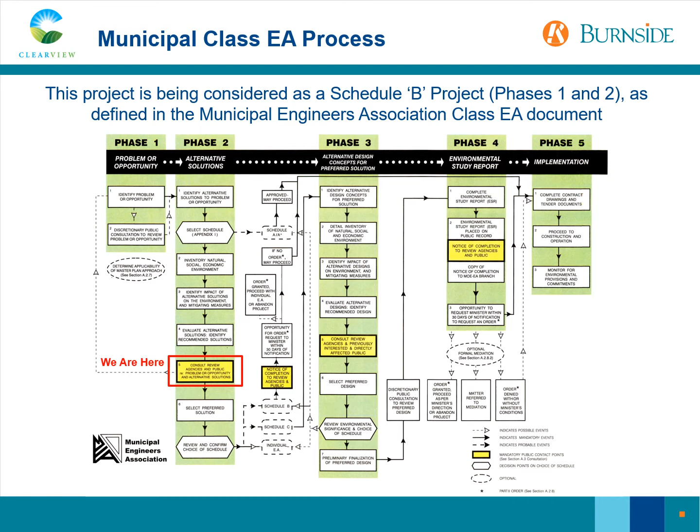The study area includes the areas of Phillips Street, Sunnidale Street, and Centre Line Road in the southeast area of Stayner. The study area is primarily existing residential land use with some commercial and institutional land uses and lands designated as environmental protection. An intermittent watercourse runs in a southwest to northeast direction through the study area and is regulated by the Nottawasaga Valley Conservation Authority. There are several development proposals within the study area that are in pre-consultation and various other stages of approval, including the Manortown Homes development located in the northeast portion of the study area.

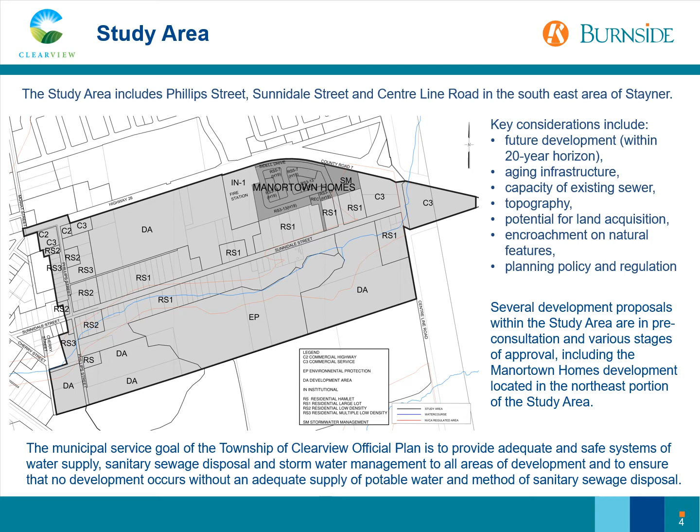Key considerations in the evaluation of alternative solutions for the study area include future development, aging infrastructure, the capacity of existing sewers, the topography of the study area, the potential for land acquisition, encroachment on natural features, and planning policy and regulations. The selection of a preferred solution is based on the evaluation of alternatives with consideration of the technical, socio-cultural, financial, and natural environment. The following slides provide a summary of the existing conditions in the study area for each of these environments.

The majority of existing properties on Sunnidale Street are currently serviced by private septic systems. The study area includes an existing sanitary sewer on Phillips Street and a small portion of Sunnidale Street, which directs the sewage northwards towards the Mowat Street sewer. Based on the elevations and locations of existing infrastructure, the extended sanitary service in the study area would not be able to drain to the existing sanitary infrastructure by gravity alone. A sanitary pumping station would be required.

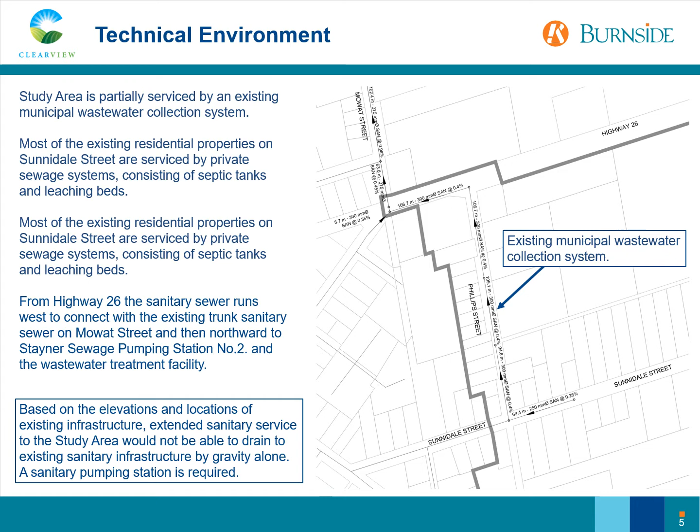The study area is zoned for residential, commercial, and institutional land use. A portion of the study area is located within a drinking water protection zone, significant groundwater recharge area, and highly vulnerable aquifer. A cultural heritage assessment of the study area identified 7 cultural heritage resources within or adjacent to the Sunnidale Street study area, consisting of a farmstead and rural residential properties representative of the late 19th century and early 20th century.

The Stage 1 archaeological assessment determined that parts of the study area have archaeological potential and will require a Stage 2 archaeological assessment prior to any construction activities if the areas identified will be impacted by the earthworks. Where any above-ground cultural heritage resources or archaeological resources may be impacted by the preferred solution, appropriate mitigation measures will be developed. The specifics on the location of future infrastructure placement and construction activities will be determined during the detailed design stage of the project.

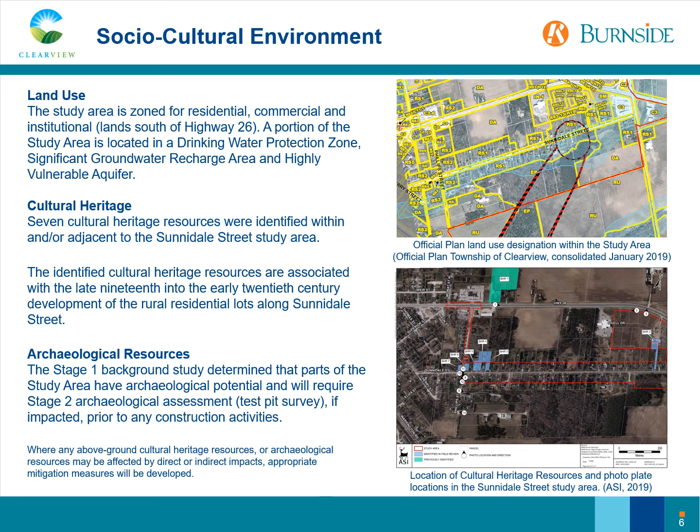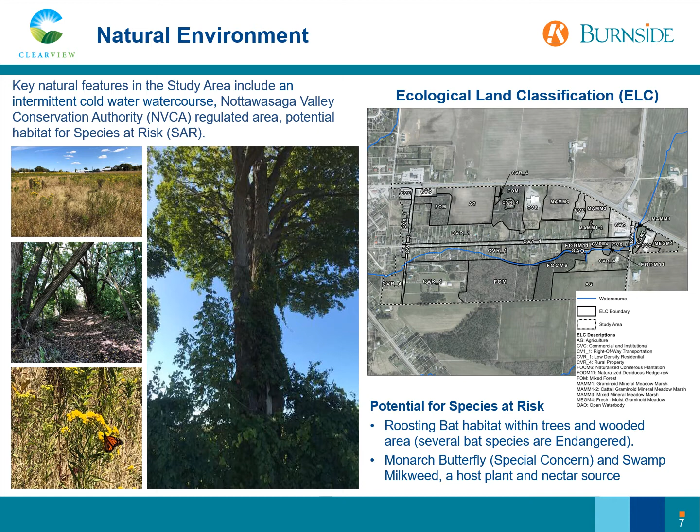The assessment of the natural environment was completed through field investigations to characterize the vegetation communities and the potential for habitat of species at risk in the study area. Vegetation communities in the study area are considered to be relatively common in Ontario. Key natural features in the study area include McIntyre Creek, regulated by the Nottawasaga Valley Conservation Authority, and potential habitat for species at risk such as bats, as well as habitat for special concern species such as the monarch butterfly.

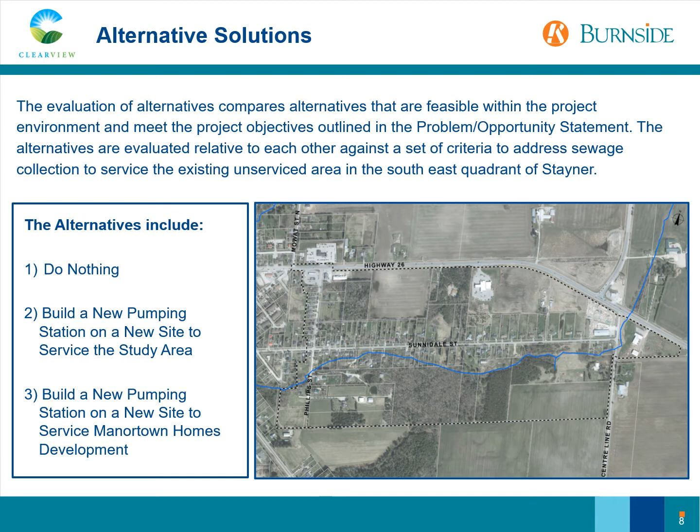Alternative solutions that are feasible to address sewage collection service for the existing unserviced area in the southeast quadrant of Stayner are evaluated relative to each other against a set of criteria which is developed based on the project environment. The alternatives considered include do nothing, build a new pumping station on a new site to service the study area, or build a new pumping station on a new site to service Manortown Homes development.

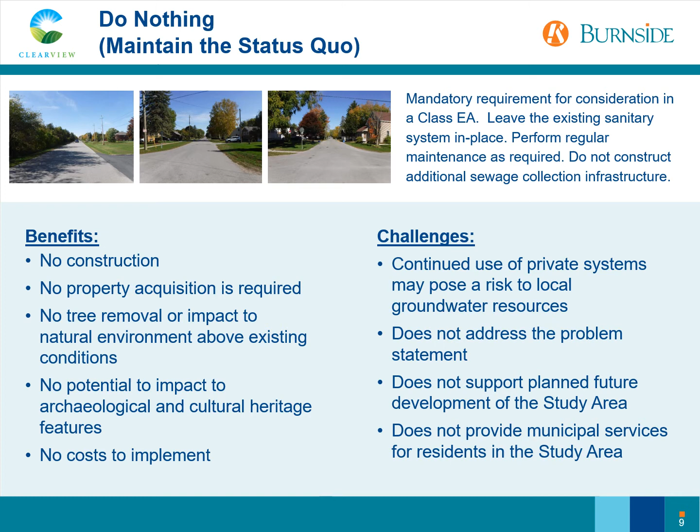This alternative allows servicing for the entire study area over time as build-out occurs, but will require upsizing and replacement of existing sanitary sewers on Sunnidale and Phillips Street. This alternative is the highest cost relative to the other alternatives.

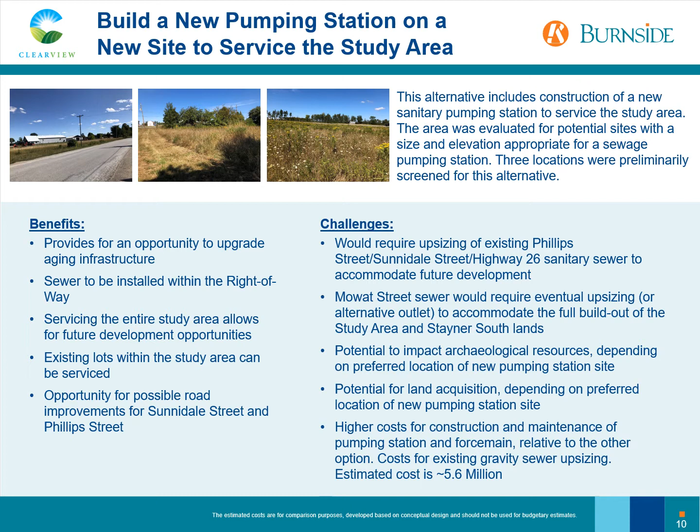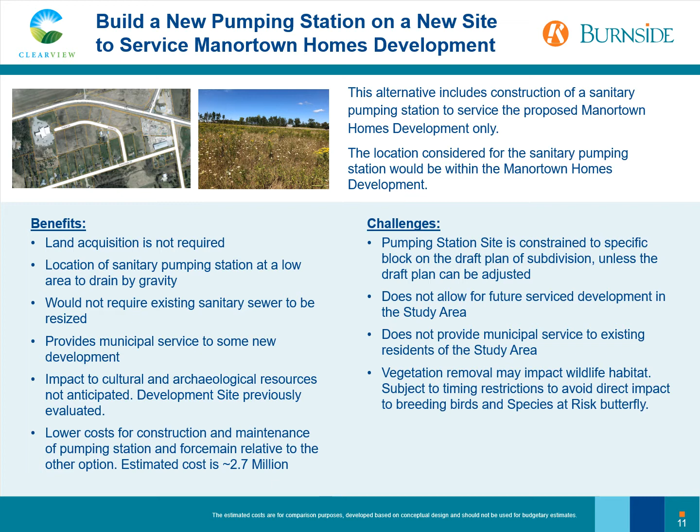Build a new pumping station on a new site to service the Manortown Homes development. This alternative includes construction of a sanitary pumping station to service the proposed Manortown Homes development only. The location considered for the sanitary pumping station would be within the Manortown Homes development. This alternative would not require the upsizing of existing infrastructure, however would not allow for the servicing of existing or future development in the study area. This alternative is a lower cost than the option to service the entire study area.

The impacts of alternatives were evaluated against the inventory of the natural, socio-cultural, economic, and technical environment of the study area, including possible mitigating measures. The alternatives were compared to each other by applying a ranking from most preferred to least preferred based on the level of anticipated impact for each criteria, with the full pie representing the greatest anticipated impact and therefore the least preferred, and an empty pie representing the least anticipated impact and therefore the most preferred. The table provides a summary of the evaluation of alternatives as an average range under each environment category.

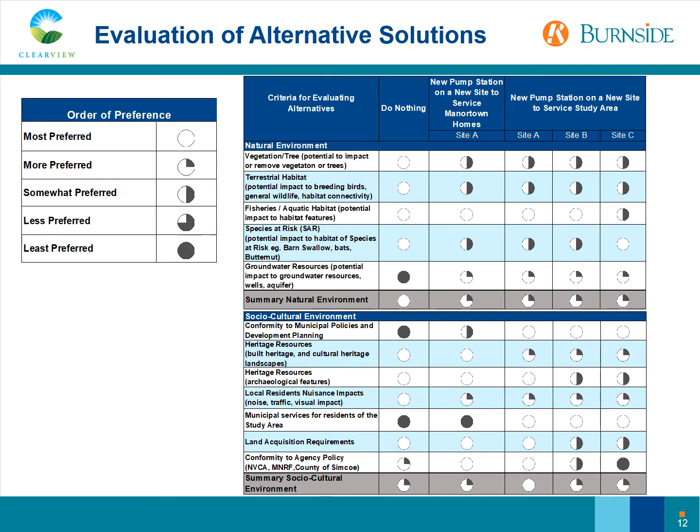The evaluation leads to the identification of a preliminary preferred alternative. The alternative to have a new pump station on a new site to service the study area received the most favorable overall ranking when compared to the other alternatives. Site A is located within the Manortown Homes development. This alternative ranks similarly to the other alternatives for potential impacts to the natural environment. The cost for construction and maintenance of a pumping station and force main to service the study area is higher relative to the servicing of only the Manortown Homes development.

However, this alternative is the most preferred for the socio-cultural and technical environments because it provides municipal servicing to the existing and future development in the study area at a location that can be designed to accommodate the sewage pumping station footprint without the need for property acquisition or impact to potential archaeological resources.

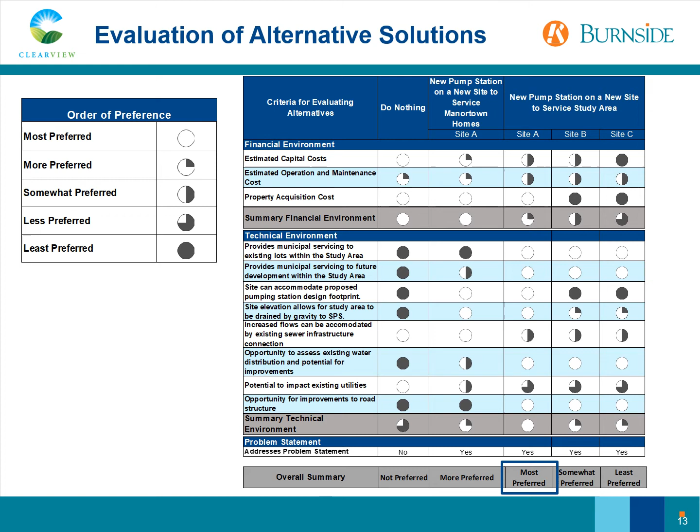The preliminary preferred alternative is to build a new pumping station on a new site to service the study area. The preferred location of the pumping station is within the Manortown Homes development, where the elevation allows for connection to the gravity sewer. This location is located outside the drinking water protection zone and furthest from the watercourse and NVCA regulated area. The site for the sanitary pumping station will be assumed by the township as part of assumption of the overall Manortown Homes development.

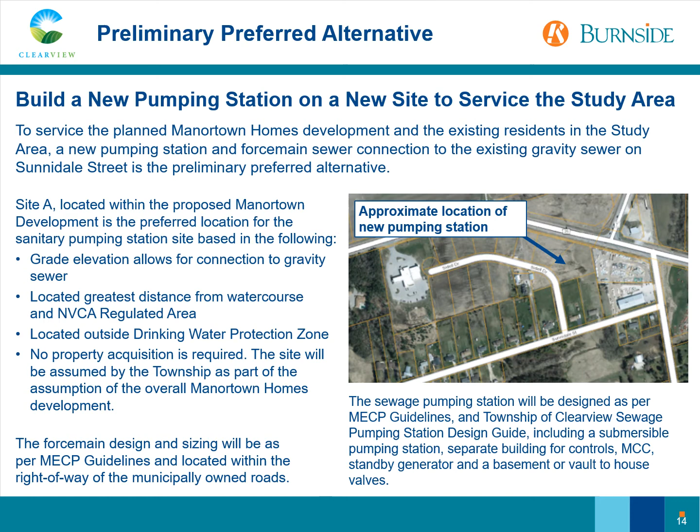This figure illustrates the approximate location of the pumping station within the Manortown development. A single or double sanitary force main will run within the right-of-way from the pumping station along Sunnidale Street to gravity sewer on Phillips Street. The design of the force main and pumping station will be completed per the Ministry of Environment, Conservation and Parks guidelines and the Township's Sewage Pumping Station Design Guide, following the conclusion of the Municipal Class Environmental Assessment.

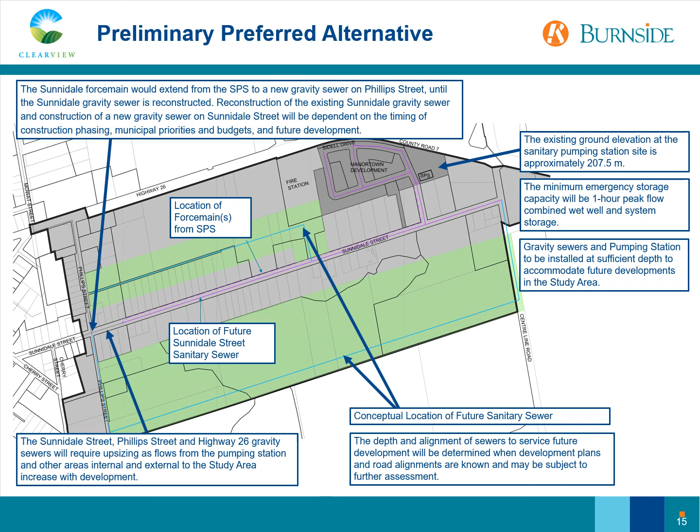The Municipal Class Environmental Assessment process, including input from the public, agencies, Indigenous communities, and stakeholders, will be documented in a project file report and made available for public review and comment for a period of 30 days following the notice of completion of the project. At this time, it is anticipated that the notice of completion and project file report will be available in the summer of 2020.

Thank you for participating in this Public Information Center. Help shape decisions made as part of this study. We encourage you to complete the comment form available on the Township's website at the link provided. You may also email or mail your comment form to one of the project team members. The presentation materials will be available on the project webpage for review and comment until August 4th, 2020. Responses for comments received by August 4th will be provided in a Public Information Center summary report, along with a summary of your written comments and posted on the Township project website. We appreciate your input and look forward to receiving your comments.